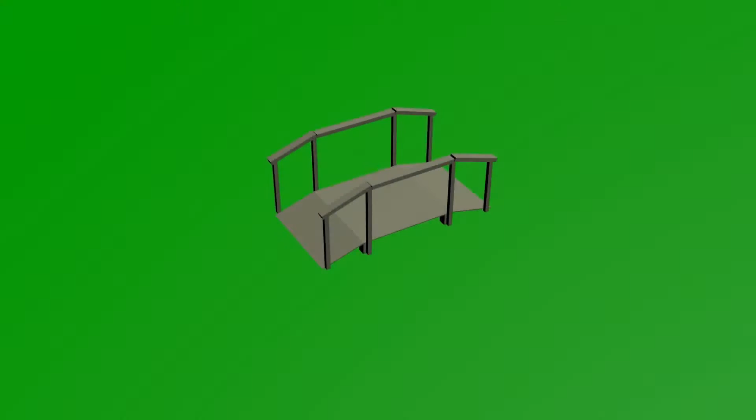The rumble bridge takes the idea of a vibrating floor to a whole new level. The materials are relatively inexpensive, and the construction process is fairly simple, making it a great scare that almost anyone can build.

Let's take a closer look at how it's constructed. The bridge consists of a platform, the 2 ramps, and 2 railings.

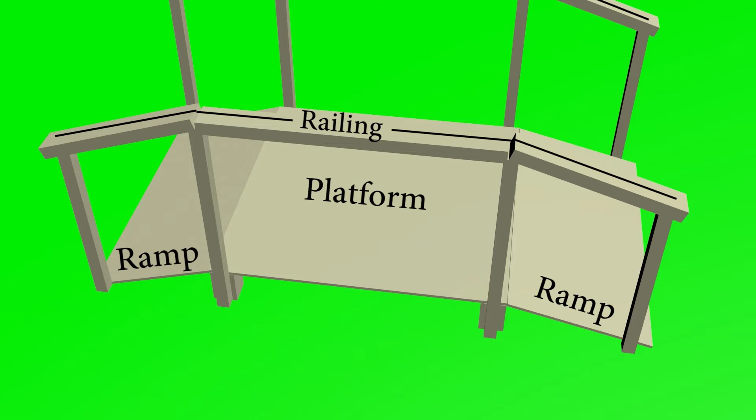The platform and ramps are constructed from a single 4x8 sheet of plywood, about 3/4 of an inch thick, so it's fairly sturdy. Cut the plywood in half to give you 4x4 pieces. One 4x4 piece becomes the platform. Cutting the other piece in half again gives you 2 2x4 pieces, which you can use for your ramps.

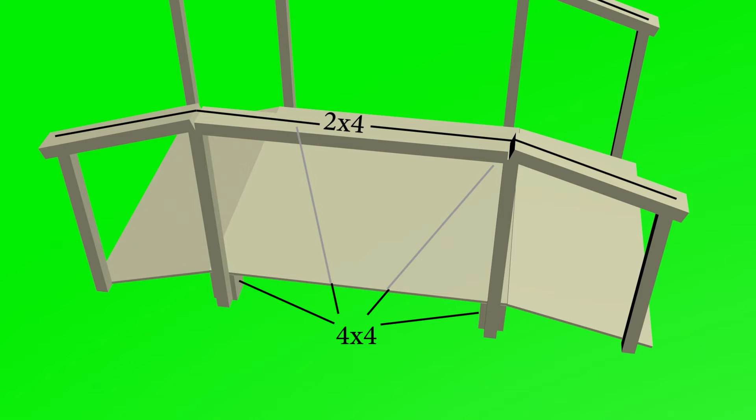The top of the railings is 2x4, held up by 2x2 pieces, bolted to the supports. The supports are 4x4 pieces, about 6 inches long, to raise the platform up. Don't forget, it's got to be strong because it has to support not only the bridge, but all of the people on it as well.

Once you've got the basic bridge constructed, it's time to make the magic happen. Let's take a closer look underneath. We'll turn up the lights a little bit, and now we have to attach our motor underneath the bridge. This provides the vibrations that will shake the bridge for us.

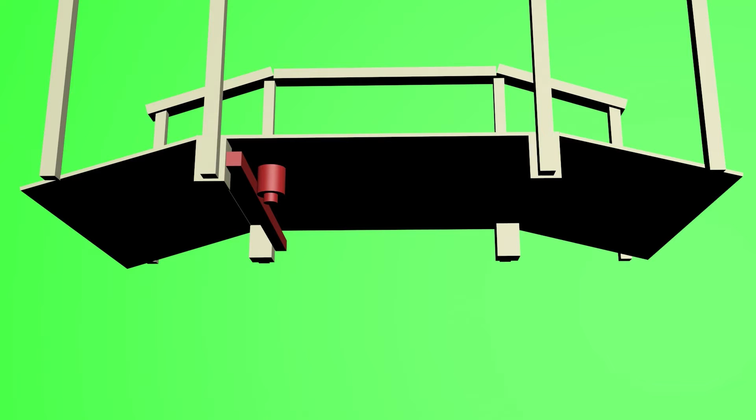By itself, the motor isn't strong enough to shake the bridge as much as we'd like. We need the bridge to be able to move a little bit. So to do this, we cut some large rubber balls in half and attach them to the bottom of the supports. The rubber balls do 2 things.

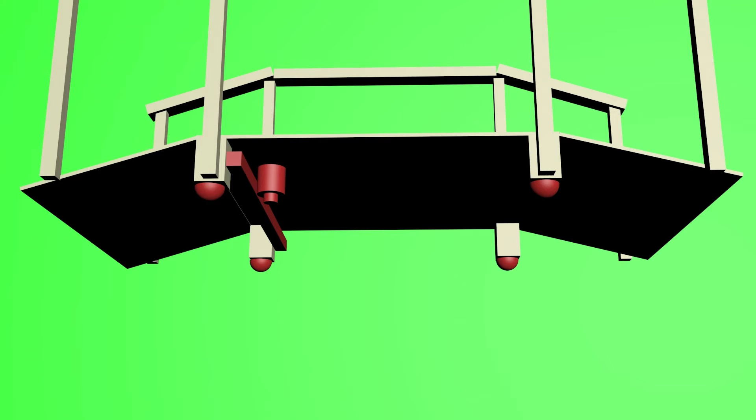First, they give the bridge a bit of a sponginess, so when people step on it, it has a little bit of flex. Also, because the bridge is now on top of a rubber support, it can move around a bit, so as the motor vibrates, the bridge will shake more violently.

That's the basic bridge construction. However, because the motor is so important, let's take a closer look at just that. Since we're going to talk about motors, the first thing you should probably know is what kind of motor to use. Now, with most of our projects, we love windshield wiper motors, but those don't cut it here.

So instead, we have to use something like this. What is this? This is actually a motor out of an electric scooter. They run off of 24 volts normally, and although it's ideal at high speeds for that, we don't need to run it that fast, so 12 volts, say off of an old PC power supply, works just great.

Okay, here's our motor. It's basically 2 wires, red and black for positive and negative, and how you wire it up doesn't matter because direction isn't important here. However, what is important is that little gear on the end.

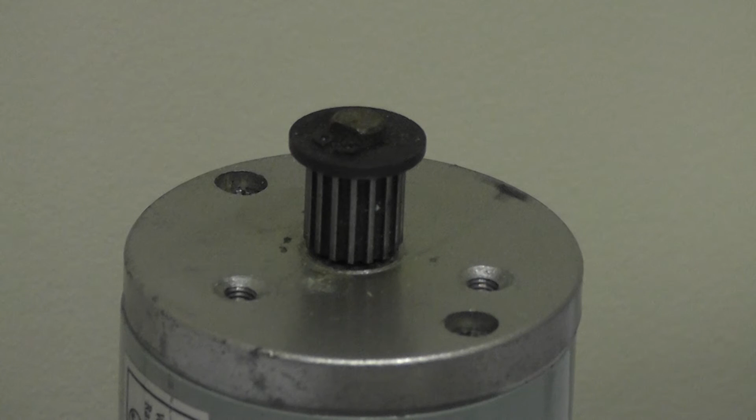Normally, this gear would have a drive belt around it to help move the scooter around. However, we can't use a drive belt. What we do need to do is attach a little metal arm to this that we can attach a fishing weight to so that the weight is offset. That way when it rotates, it'll vibrate a lot.

What you attach things with is important since it has to be really strong, so glue is out of the question. What I use are those little clamps that you use to attach fittings to the end of things like a garden hose. They'll slip right over the end and then you can tighten it up with a screwdriver and there is no way it is coming off. That's a great way to hold things on, and that way it'll last a long time.

About the only other things you'll need will be the metal bracket, the clamp, the weight itself, plus a nut and a bolt of some kind to hold the weight onto the arm, and some metal strapping to hold the motor against the piece of wood that you mount under the bridge.

Also, of course, you'll need some hot glue or something to hold the ball halves to the bottom of the bridge, and various screws and things like that to put the bridge together. You'll also need some very large bolts to bolt the railing supports to the supports under the bridge. These have to be very strong because typically that's how you move the bridge around.